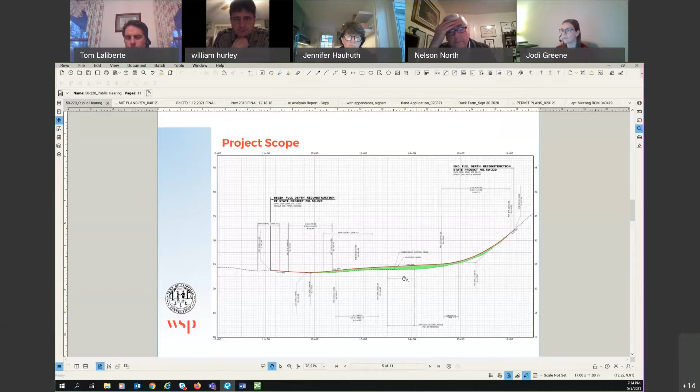The reason for this, we wanted to raise the profile over the structure as much as possible to help increase the hydraulic opening. As part of that, we also corrected the sag curve to the latest design standards. That's the reason for the profile increase along the roadway, and the average increase at the bridge structure is only about 6 inches.

This is showing a comparison of the existing elevation of the structure and the proposed. The existing structure is the 2 spans, about 56 feet long. We will be increasing that to a 75-foot span and removing the center pier, so a single span replacement. That'll really help convey the water a lot cleaner at this crossing.

So both the existing and proposed structure are overtopped at the 50-year storm, but the overtopping is reduced with the proposed structure. We are also having an open railing on the structure for if and when overtopping occurs.

This is showing a comparison of the existing cross section against the proposed. The proposed girders are slightly deeper due to the change from 2 spans to a single span, and we are also concealing the utilities below the bridge in the proposed condition.

In the existing condition, the water main is mounted on the outside of the structure. The width of the structure increases slightly, just to be able to add a traffic safety railing.

Bill mentioned the project is funded through the federal local bridge program. That means 80% of the funds are federally funded and only 20% are by the town of Fairfield.

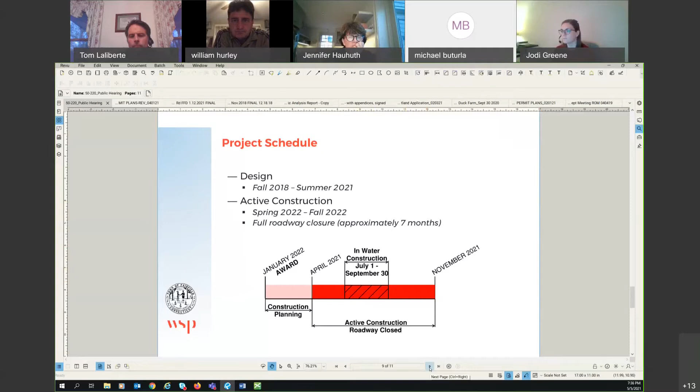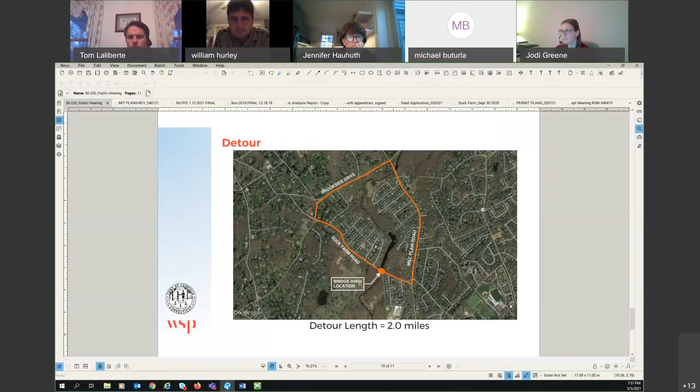This is the detour that will be implemented. It's a 2-mile detour, the same one used for the replacement of the Mill Plain Road Bridge a few years ago. So it goes up Mill Plain, down Brookside, and back down Duck Farm.

Lastly, this is just showing a summary of the wetland impacts. Majority of the impacts are temporary, to be able to construct the bridge. The permanent impacts are shown here in red. Again, it's just opening up the structure, increasing the span length, and then removing that center pier.

We're also installing boulder clusters as requested by Connecticut Fisheries. Lastly, on the south side of the bridge, we will be replacing the drainage outlets, and we will be pulling those back out of the wetlands to outlet outside of the wetlands. So with that, thank you for your attention, and we'd be happy to answer any questions you guys have.

I have a question. The permanent impacts with the 636 square feet, is that the additional permanent impact when compared to the current footprint, or what is the difference between the current permanent impact versus the new permanent impact?

So that is a comparison from existing conditions to proposed. As you can see, it really is just showing the red along the existing abutments, because we're going to be opening up the abutments, and then the footprint of the pier itself. So it's just comparing the difference between how it is now and the proposed condition.

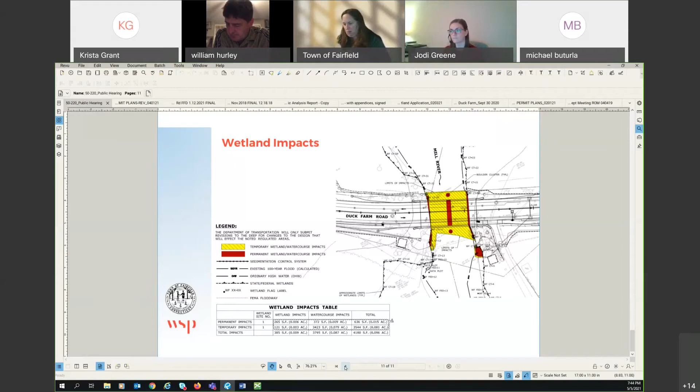My question is, since the elevation of the bridge isn't going any higher - I know we were just discussing this a moment ago - how will the flow of the river be helped during those large floods we were just discussing? I know currently, at the elevation the bridge is now, it overtops, and it also fills in my backyard, which turns into the river, and it sits and swirls in place in my yard. Then it goes over the bridge and over the road. Since the new bridge will be the same height, how is there going to be more flow because the pier is removed in the middle? Is this going to help a lot?

The bridge is about 6 inches higher, so as you said, Krista, it's essentially the same. The span is a little bit longer - the existing bridge has a 56.5-foot span with that pier in the middle, which is about 3 feet wide, whereas the new one is a 75-foot span with no pier. So really it's that opening that matters. There probably are going to be large storms, like that 50 and 100-year storm we're talking about, that will cause that same thing you're seeing.

The hope here is that for the more common storms, you won't see that backup. And just to add, removing the pier also removes an obstruction, so there won't be debris, branches, and items getting stuck on the pier which would further back up water behind the bridge. It was a hard balance with impacts to the property above the bridge once you raise it, and what happens with the road and driveways.

Before we go to anyone else from the public that would like to speak, commission members, do you have any other questions? Also, does staff want to say anything?

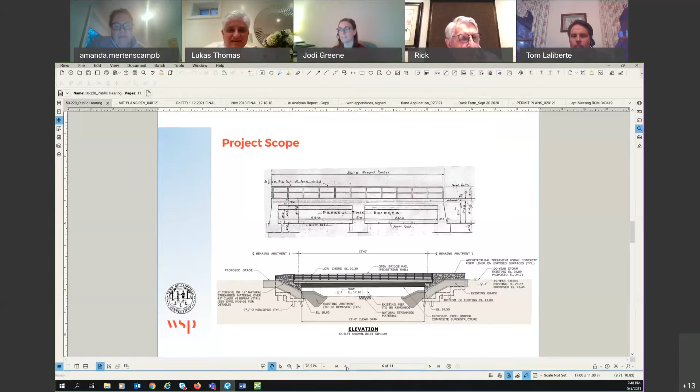Ms. Greene, is the pedestrian rail and pedestrian sidewalk a new addition? It is not, it is existing today. There is a sidewalk there, we're just reconstructing. I think the sidewalk on the bridge right now is 5 feet, and we're increasing it to 6 feet to agree with town standards.

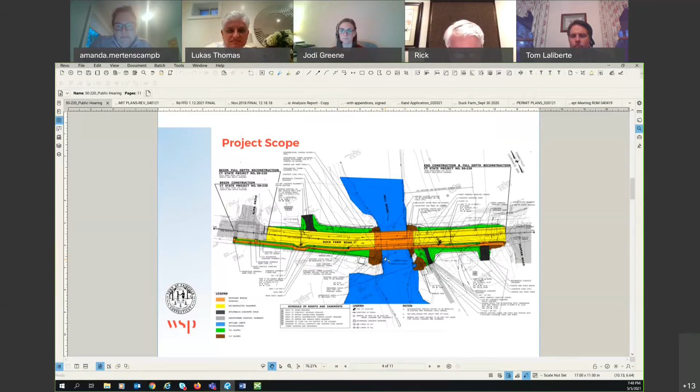Did the rail change very much? The cross section of the railing - what's out there now is very minimal, so we are putting a more substantial railing out there. Unfortunately, if there was a collision with the existing railing, it really wouldn't do much, so the proposed railing is per local standards for safety. Is that an open railing? Yes, it's open railing for the hydraulics.

Any other questions from the commission? Go ahead.

This is Bill Hurley again. I just wanted to say the goal here is to have it maybe look like the Valley Road Bridge. If anyone wanted to see what it would look like, we worked with that neighborhood and it was pretty much consensus. We could do the same here with a couple of the neighbors who want to be involved. But that's our goal, to make it look very similar to that. It meets the federal guidelines, and it's fairly ornamental considering some of the other choices. If anyone wants to look at that, it'll give you a good idea.

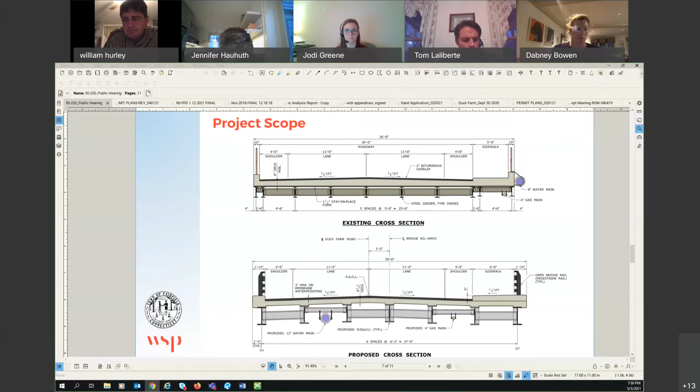That's all. Are there any other members of the public that would like to say anything, or anyone on? And the applicant's finished, there's nothing else, correct?

Now listen, I should have asked this question before I started, but go ahead. I just wanted to show you, this is what the Valley Road Bridge looks like, so it'll be a similar presentation for Duck Farm with the black open railing. Yeah, very nice.

Okay, anyone else? You're all set? I have a question of everyone, or Sarah. Do I need to close out this IWPA public hearing

to vote and then open up a new public hearing for the other public hearing IWPA? Yeah, we'll close this one, and then you guys can discuss and decide, or we can start the other one. Okay, but this one would need to be closed. Sorry, I've never done two in one night.

Do we have a motion to close this public hearing? To close this public hearing. Second. Dabney? All those in favor? Aye. Aye.

Okay, do we have a motion to discuss this IWPA? The motion would be to approve with the conditions. Is that what it would be? Okay, so I'll move that IWPA 2020-21-11 be approved with conditions.

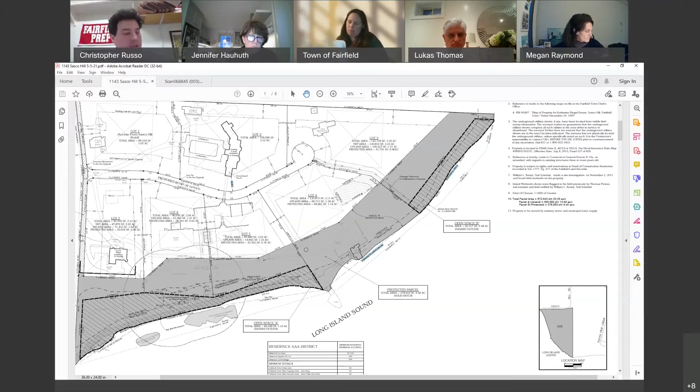We are actually in the process of working with the Aspetuck Land Trust to expand the restrictions in the original conservation restriction document, which will expand the area where there's going to be some coastal meadow grasses. This is one of the rare examples of a coastal meadow, so we're working with Aspetuck Land Trust to expand that coastal meadow area and enhance some of the restrictions beyond what's already there now.

As far as work within the regulated area, there's really not much we're proposing for the regulated area. This is a demolition plan, and you can see here, I'll zoom in.

Right now there is a paved walkway that runs down through the regulated area. It goes down to the beach house, which is one of the main features on the Fairfield shoreline. So it runs through this regulated area, and that's being removed. The pool and the tennis court, which are just on the edge of the regulated area, are also being removed.

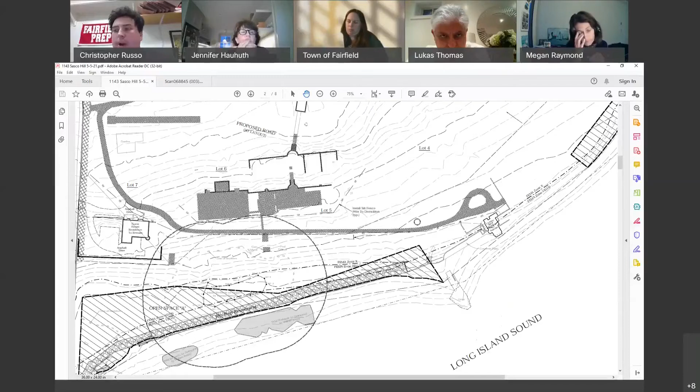Otherwise, we're really not proposing anything within the regulated area. Bill Kenny's working on a plan that will talk about maintenance of that area, removing invasives. But truth be told, there's actually a previous approval on this site where we already have to do that, so it's not really a change from what already exists.

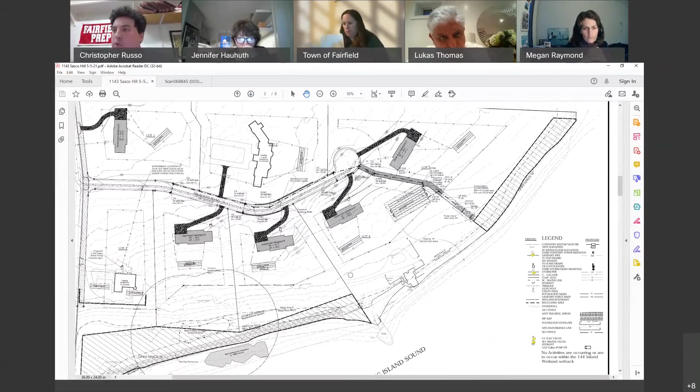We did do a plan that showed where potential dwellings could go, and where drainage systems could go for those dwellings. The anticipation is that if this subdivision is approved, my client would put these lots up for sale, and any new buyer would come before you in the future with a different design for these houses. They're just standard houses we've placed on these lots to show that they could fit within the setbacks and how they would be accessed, and also that the drainage systems and all those systems are outside

the regulated area, which is actually a pretty sizable setback from the wetlands—it's 144 feet. So really, there's no significant work proposed within the regulated area.

And that's basically it. I just wanted to introduce it, and I know we'll be back before you again next month, as staff will have reviewed our response to their comments.

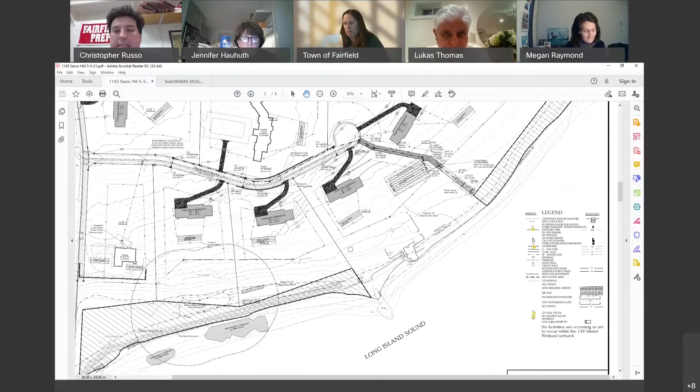Bill Kenny's on the line. I don't know, Bill, if you want to speak a little bit about the wetland on this property, its characteristics, and any information you could provide them on it.

Sure, I could give a brief description. Good evening, I'm Bill Kenny, principal of William Kenny Associates here in Fairfield, professional wetland scientist, soil scientist, and landscape architect. I've been involved with this property several times over the last 20 years.

I mapped wetlands on the property beginning in 2001, and was back there again around 2008 or 9 when the seawall was replaced. There was an old seawall that was replaced, and they put in a boulder revetment to protect the coastline from soil erosion. That was in the area close to the inland wetland.

And the wetland is at the base of the slope. This is a drumlin landscape feature—the property sits on a drumlin where there's hard pan soils. What that means is you get down 2 or 3 feet and the soil is fairly compact, preventing a lot of water from moving vertically, so the water ends up moving horizontally. Often when you have that, you end up with a wetland at the base of the slope, and that's what you have on this site—a wetland pocket shown on the drawings.

As part of some of the comments from staff, we are going to revisit the property and take another look at the delineation and review that, to see if there's been any changes. That wetland is a marsh area, dominated by herbaceous plant material, primarily Phragmites, the invasive reed grass.